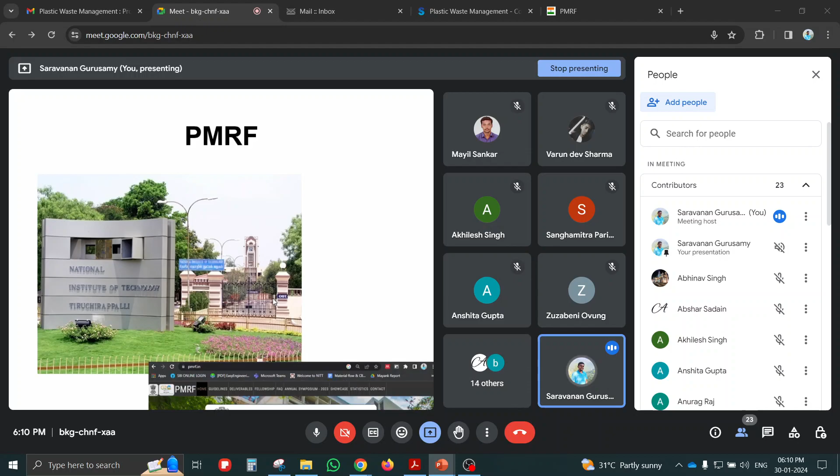I have done my BTech in civil engineering from the Government College of Engineering in Tamil Nadu, and my MTech from Anna University in Chennai through GATE score. Then I joined NIT Tiruchirappalli in 2021, and I am now the Prime Minister Research Fellow under the Ministry of Education, Government of India.

So this is a simple slideshow. Hope the slide with the web page is visible. This is the Prime Minister Research Fellows website, and these are the list of institutes eligible to get the PMRF fellowship. The only NIT in India to get PMRF fellowship is NIT Trichy, and I am one of the research PMRF in this institute.

I have submitted my proposal and joined as a lateral entry scholar for the PMRF, and as per the deliverable guidelines, I am expected to teach in any of the IITs, Polytechnics, Engineering Colleges, or NPTEL courses, 1 hour per week, to complete my deliverable guidelines.

So now NPTEL has assigned me this course, Plastic Waste Management, as I have an environmental engineering background. I am teaching every week 2 hours as per the schedule, every Tuesday 6 to 8 p.m. I am receiving a fellowship of 75,000 per month in my third year, and I will get 80,000 in the next year.

So this is a broad introduction about the PMRF. We will continue with this lecture's PPTs.

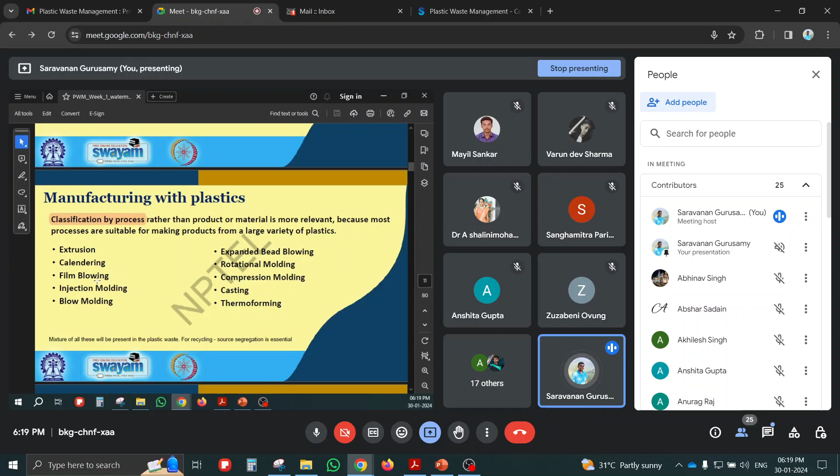Okay, so these are the additives used in the manufacturing of plastics, and some of the processes used to manufacture plastics are extrusion, calendering, film blowing, and all, we are going to see in the upcoming slides.

Extrusion is a major process used to make plastics of desired shape, using different dies to make the product of desired shapes. We use screw conveyors, twin screw or single screw conveyors, to heat the pellets. We get a molten plastic at the outlet, and we can add a die to get the desired shape and the product. We can make a hollow tube, sheets, or any product using this screw type of extruder. These are called extruders. But the limitation is we can only get uniform cross section products.

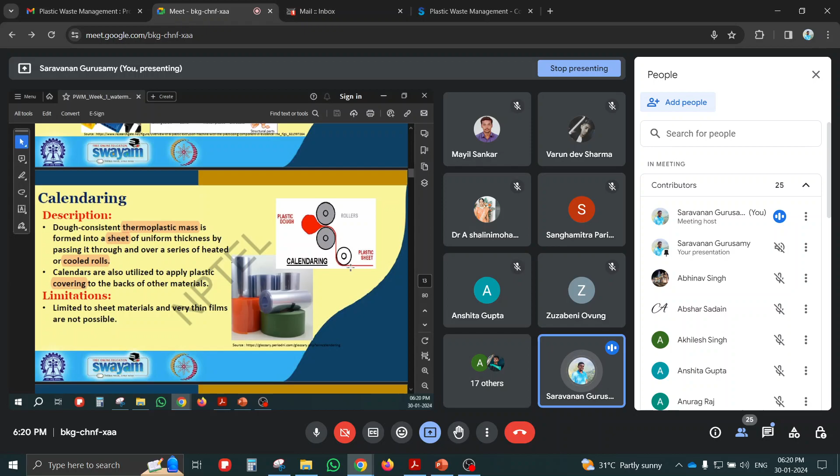The next one is calendering. Calendering is used to produce sheets of plastics like thermoplastics. Plastic dough is pressed between two rollers, and you get a sheet of plastic. This process is called calendering, and the limitation is that very thin films cannot be made using this process.

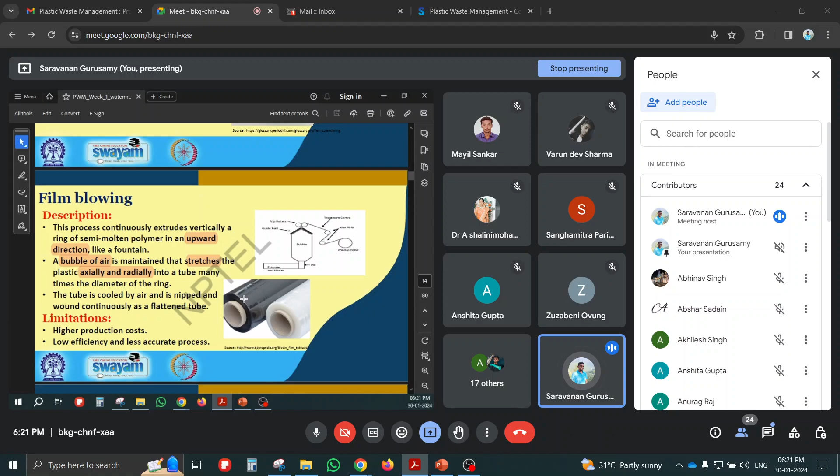So for making thin films, we use film blowing. Here, like the extruder, the molten plastic comes up and air is also blown through the die. The plastic film is divided into two hollow sections, and it is rolled between two rollers to get a thin sheet. An upward movement happens with a bubble of air flowing from the bottom, stretching axially and radially to a diameter of ring, and it forms a flattened tube between the rollers. The limitation here is higher cost of production, low efficiency, and less accuracy.

This is a process called injection molding. Here the same type of extruder is used, but along with extrusion, we use pressure, like a hydraulic jack, to press the mold, and we get the desired shape in the mold. That's the difference between extruder and injection molding - we are pressing the molten liquid into the desired shape we want. Here also it's not economically practical.

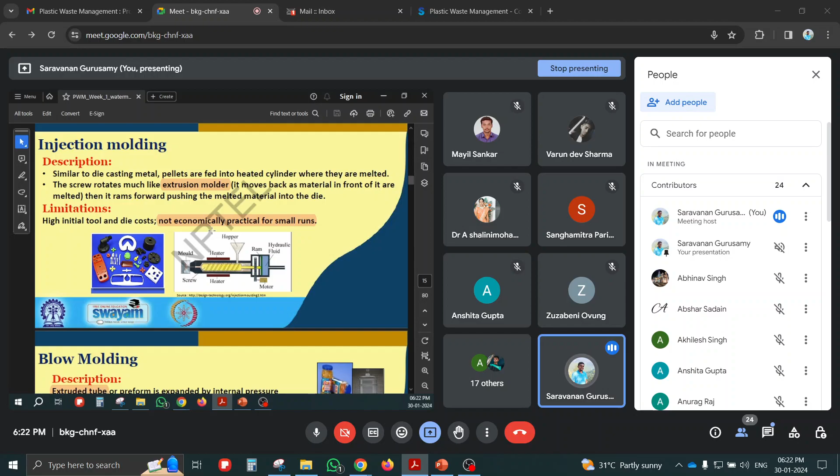Then blow molding. You can see blow molding in our plastic bottles or water bottles - they are made using the blow molding process. After extrusion, the molten liquid flows through a tube, then compressed air is also flown through the same tube, and it expands to the desired shape, then cools down, and trimming happens. Then we get the final product like bottles or containers.

Then expanded bead blowing - this is the process used to manufacture foamed plastic. This type of foamed plastic can be produced using bead blowing. The beads are first filled into the hopper, then heated under high pressure, and we get an expanded and blowing agent of foamed plastic. It will have a cell structure. The limitation is it creates more waste.

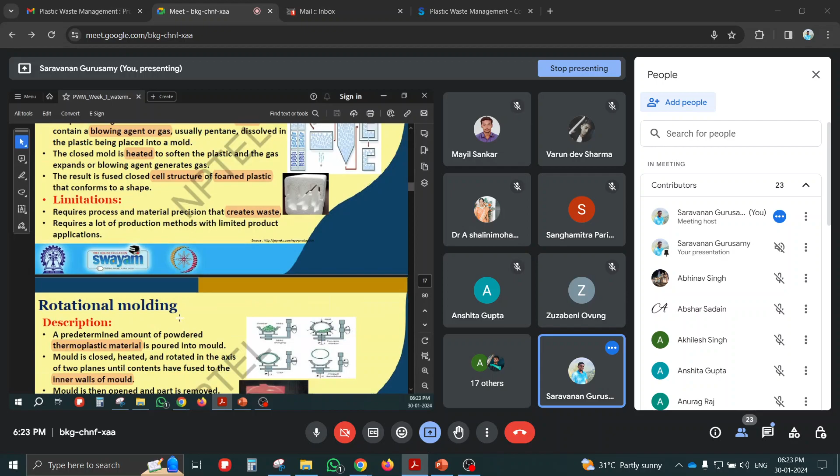Then this is called rotational molding. The pellets, or raw material for the plastic, are rolled into the desired shape under heating, forming a layer around the mold. Drums or septic tanks can be manufactured by this process. First the lower hemisphere is filled with plastic raw material, then the top one is fixed along with the bottom one, then it is rolled under heat. The inner wall of the mold is smoothly filled with raw material, and you get the product after cooling down. The limitation is it is limited to only hollow structures, and the production rate is also very slow.

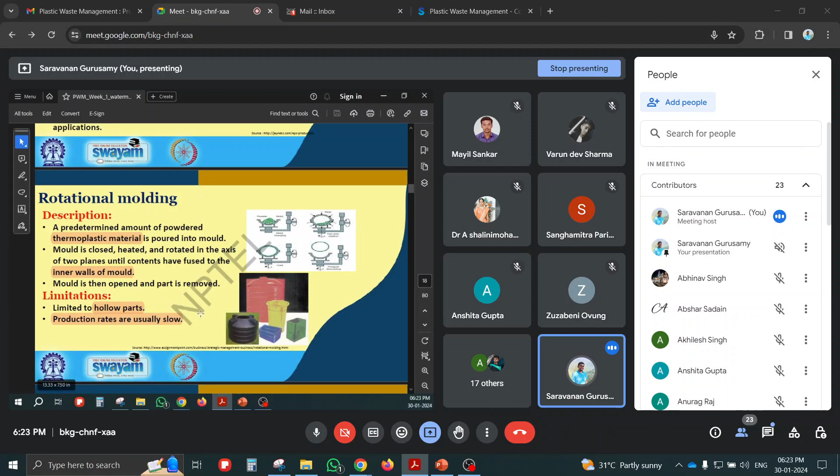This is compression molding. Here direct compression, along with heat and pressure, completes the polymerization process, and the product is ejected out.

This is a casting process. It's simple, like clay casting. The desired mold is cast with the liquid raw material plastic poured without pressure. Just by flowing liquid, it applies over the desired shape, and forms the product, like spoons or toys, which we can make using this casting process.

Then thermoforming - in this process, the sheet is blown upward or downward using the mold. The thermoplastic sheet uses a vacuum to pull or push, forming a desired shape. Here also the limitation is high scrap forms during the manufacturing process. So these are the characteristics of plastic.

Plastic has high resistance to chemicals and corrosion. It can be both thermal and electrical insulator, having a high strength to weight ratio, durable, resistant to water, and having low toxicity.

In the discussion forum, somebody asked about plastic being low toxic. Why? Because the monomers used in manufacturing plastic are less toxic, but the additives added to make plastic more durable and to suppress the degradation process make the plastic toxic during degradation.

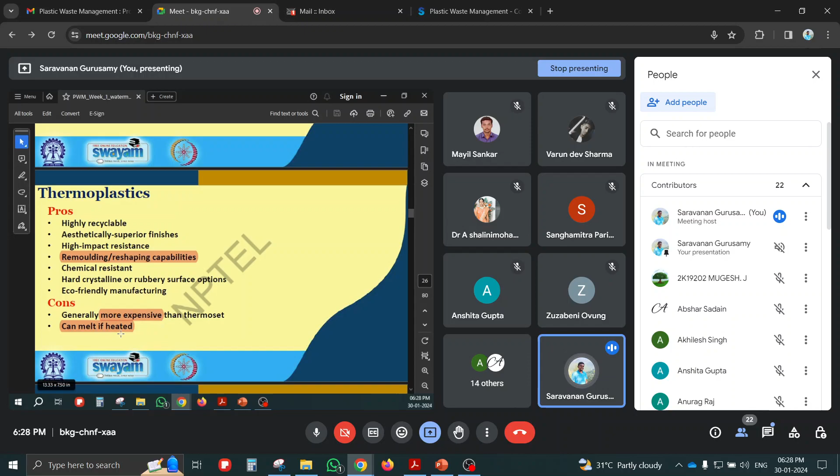An important application of thermoplastic is it can be remolded and reshaped, giving it reshaping capability. The problem with thermoplastic is it is more expensive, and melting if heated is the problem. Examples of thermoplastic: polyethylene, polypropylene, polystyrene, Teflon, nylons, polycarbonate, acrylics, ABS.

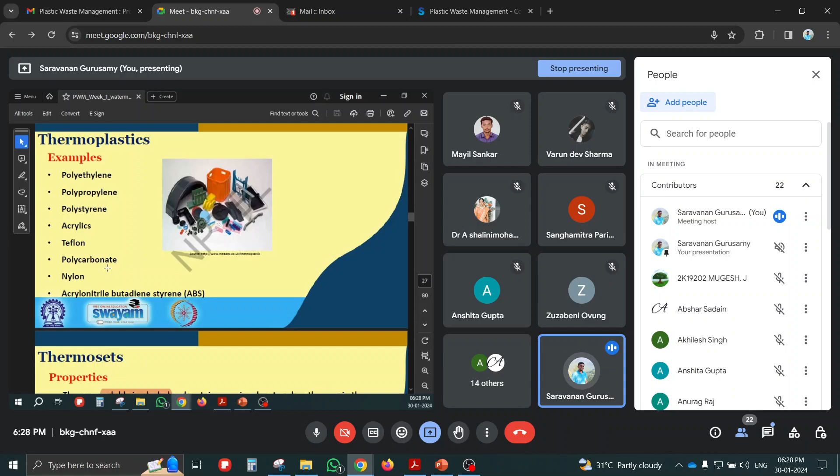These are thermosets. Thermosets are insoluble in alcohol and undergo an irreversible chemical process, so they can't be recycled. But they are durable, strong, and hard, mainly used in engineering applications of plastics.

Our laptops are made up of thermosets, and some plastic bottles and caps are made up of thermosets. They are more resistant to high temperature. The problem is they can't be recycled and are difficult to surface finish.

Examples of thermosets are epoxies, polyurethane, unsaturated polyesters, phenolics, and silicones. You can remember these examples, as sir usually asks assignments based on these types of examples of thermoplastics and thermosets.

These are classifications of plastics based on structure, that is homogeneous or heterogeneous plastics. The monomer containing only hydrocarbon atoms is called homogeneous plastic, like polyethylene, polypropylene, polystyrene. Some may have carbon, hydrogen along with oxygen, nitrogen, and other elements, exhibiting a heterogeneous structure, like polytetrafluoroethylene, polyvinyl chloride, acrylonitrile butadiene styrene (ABS). These are examples of heterogeneous plastics.

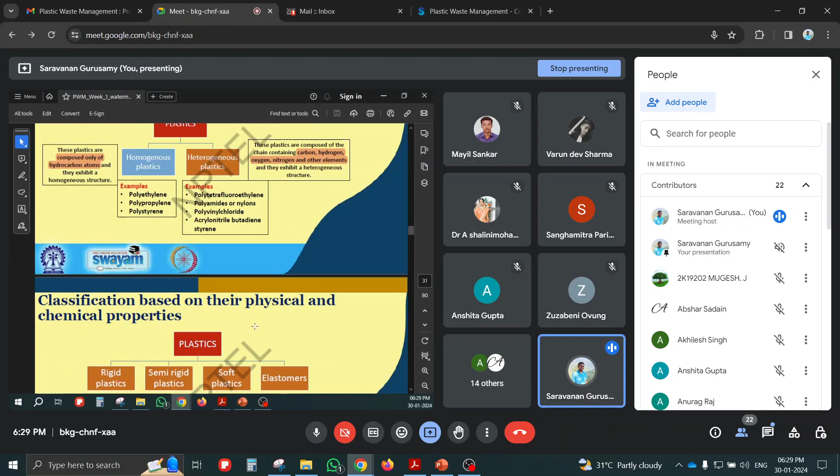Plastics based on their physical and chemical properties are rigid, semi-rigid, soft, and elastomers. From left to right, you can see rigid to elastic, with elastic property increasing. You can see some examples here.

HDPE, PP are rigid plastic. PET, or semi-rigid like LDPE - carry bags are made up of LDPE, flexible ducts like crushable tubes used in exhaust pipes, and PVC sheets are semi-rigid plastic. Soft plastics are used in children's toys, rattles, and fishing baits.

Elastomers like polyisoprene, polybutadiene, and polyisobutylene are elastomers. We can see this in tires and some flexible toys. We can use elastomers in gaskets as well.

These are the properties of rigid plastic, having a high modulus of elasticity. As you know, modulus of elasticity is stress by strain. High modulus of elasticity means we need more stress for a small strain - for a lower strain to happen, we have to apply larger stress. So those are all rigid plastics. Semi-rigid plastic has a medium modulus of elasticity.

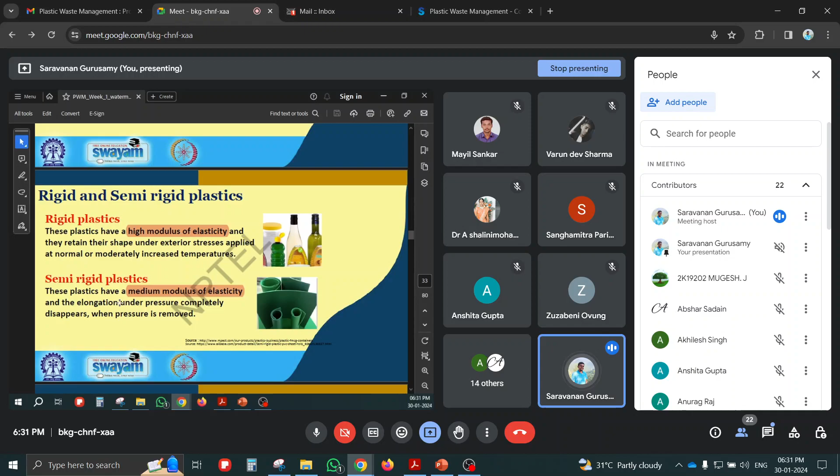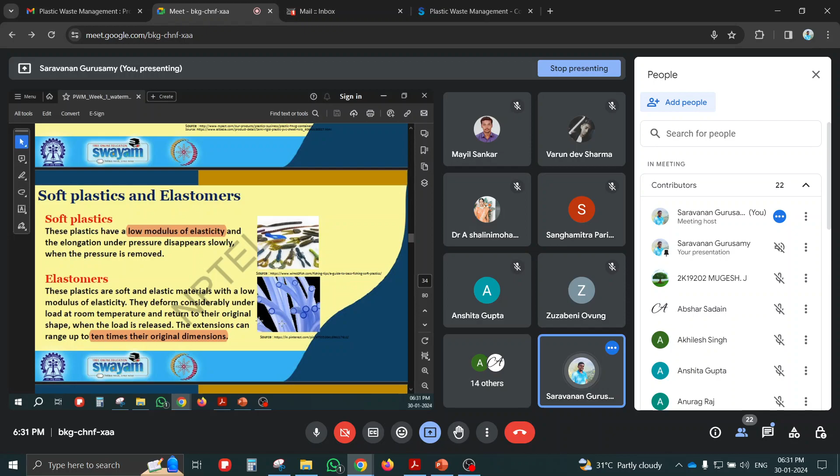Soft plastics have a low modulus of elasticity; they elongate under pressure and disappear slowly when the pressure is removed. But elastomers, at room temperature, will expand 10 times their original dimension under some pressure. Tubes like this, silicon tubes, are elastomers.

This is the classification of plastic based on the resin or type of plastics. We have given different codes from code 1 to code 7: PET, HDPE, PVC, LDPE, PP, PS, and other plastics. Other plastics may contain polycarbonate, ABS, acrylic, acrylonitrile butadiene, LCPs (liquid crystal polymers), nylon, or other types. The code was given in such a way that the first one is easy to recycle, and the easiness decreases as the number increases. So this is the basics of this code.

This is the explanation for PET. The most used plastic on the planet is PET plastic. As you know, all the transparent water bottles are made up of PET only, and this has code 1. Polyethylene monomer is used in the manufacturing of PET, and it is oxygen permeable, lightweight, semi-rigid, and hygroscopic in nature. Examples for PET include ketchup bottles. Most water bottles and food storage containers are made up of PET.

This is HDPE. HDPE was first invented in 1953 to make pipes used in storm sewers, drains, and culverts. This is the most commonly recyclable plastic. Mostly used plastic is PET, and the most commonly recyclable plastic is HDPE. This is the monomer structure for HDPE. It has a high strength to density ratio, which is why it's called high density polyethylene, with density ranging from 930 to 970 kg per meter cube. It is harder and can withstand higher temperatures.

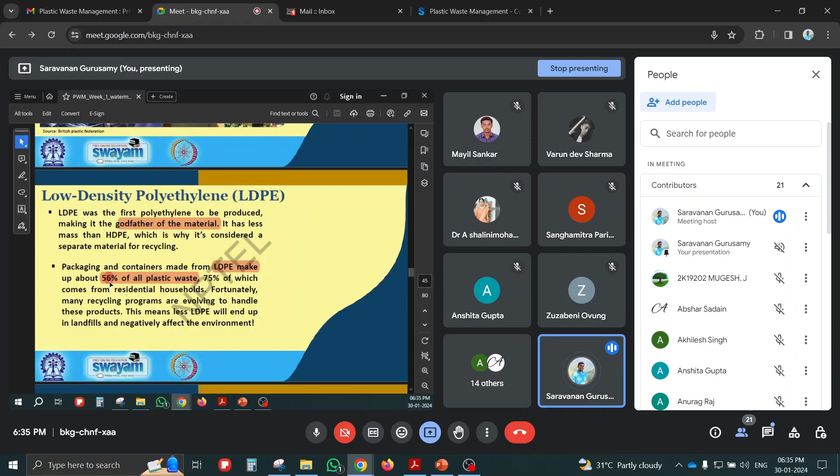LDPE is the godfather of the material, and 56% of all plastic waste contains LDPE. This is the monomer of LDPE, and the name itself indicates low density polyethylene. Its density is very low, from 0.91 to 0.93 gram per centimeter cube, and it can withstand temperatures of about 80 degrees continuously and 90 degrees for a short time.

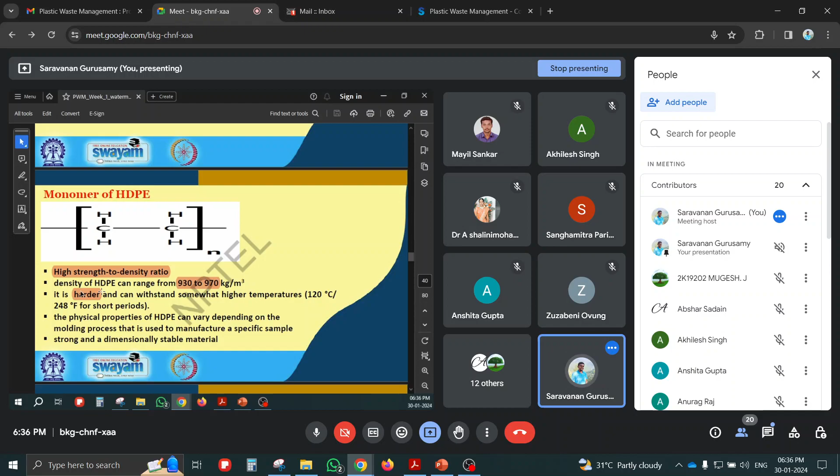But HDPE has a density of 0.93 to 0.97 gram per centimeter cube. Applications of LDPE include manufacturing packaging like carry bags or plastic bags. Some toys are also manufactured using LDPE.

Then polypropylene, PP. PP was also invented in the year 1951. Only a small fraction of PP is recycled, about 3%, but the plastic with the least fraction of recyclability is PVC, at 1%. Properties of PP, polypropylene, include: rigid, opaque, flexible, low density, excellent chemical resistance, good stability to high temperature and humidity, and weathering resistance. Applications of PP include food storage containers, chair making, knife handles, and storage containers.

Then polystyrene or styrofoam, that is PS. This was also invented accidentally in 1839, while preparing medication, across polystyrene.

Since polystyrene is lightweight and easy to form into a plastic material, it also breaks effortlessly, which is harmful to the environment.

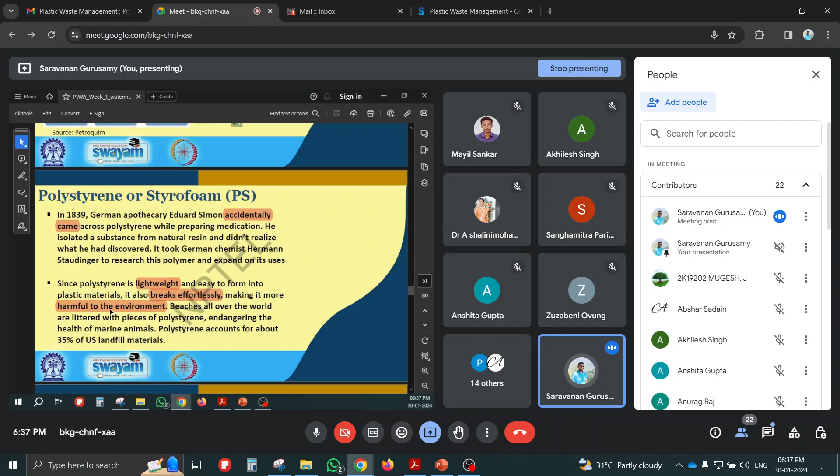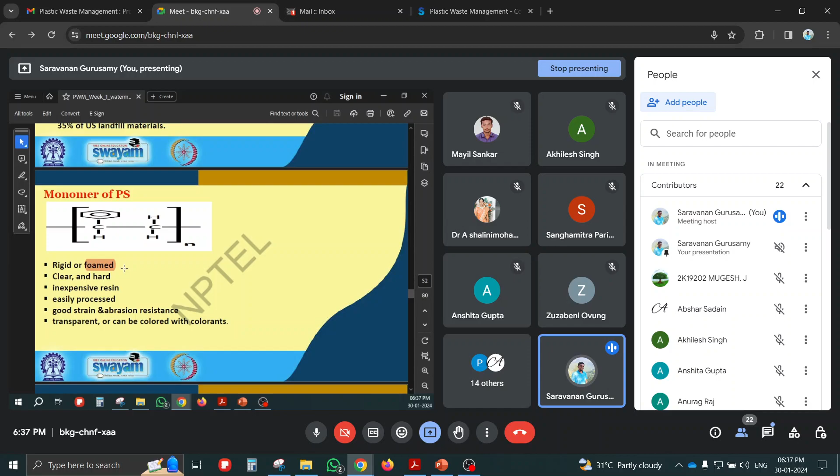This is the monomer used in manufacturing PS, and it can be rigid or foamed. The foamed plastic is made up of PS. This type of food packaging, like one-time use plastics, are made of polystyrene, such as food containers, glasses, and one-time use plastic cups.

Most polystyrene is single use. Examples include bulletproof glasses, headlamps, and baby feeding bottles, everything is made up of this.

So others are, in the seventh class, we are merging all other plastics like BPA, ABS, everything coming under this miscellaneous plastics category. Polycarbonate, polyacrylic, acrylonitrile butadiene styrene, fibers, nylon will come under this others or miscellaneous plastic category. Many BPA products fall into this category.

We have to avoid this in food products because, as I mentioned, seventh others are in the seventh code, so it's very hard to recycle. It's not very easy to break down, and it is impossible to recycle, but it has good properties like UV resistance and glass-like visibility.

That's why we are using this in bulletproof applications. Sorry, I have misplaced this here, actually this should come here. So other examples of the seventh code is polycarbonate, having a UV resistant property.

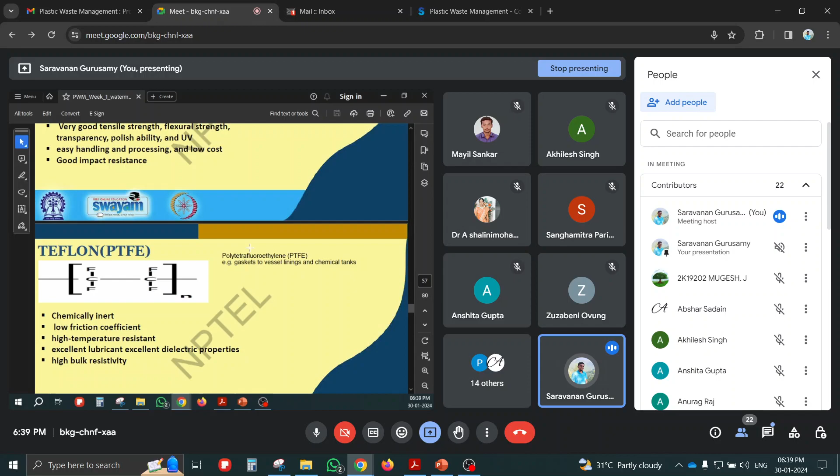Polycarbonate is used in aircraft canopies, and Teflon is used in gaskets and vessel lining.

Polyamides are used in clothing fibers, used in the textile industry, we can use polyamides.

ABS is acrylonitrile butadiene styrene. Some of you may have seen Lego toys, those building blocks are made up of this ABS.

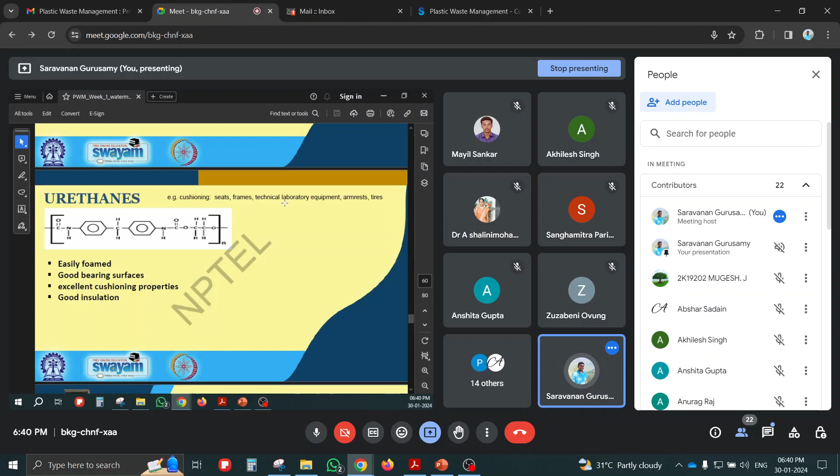Urethanes are used in the cushioning of car seats, and some frames and technical laboratory equipment are made up of urethanes.

For medical applications, like IV, respiratory fittings, catheters, surgical equipment, and disposable gloves. As you know, all the masks we used and protection kits during COVID were made up of plastics only. And in construction industries, from top to bottom, we are using different types of plastics.

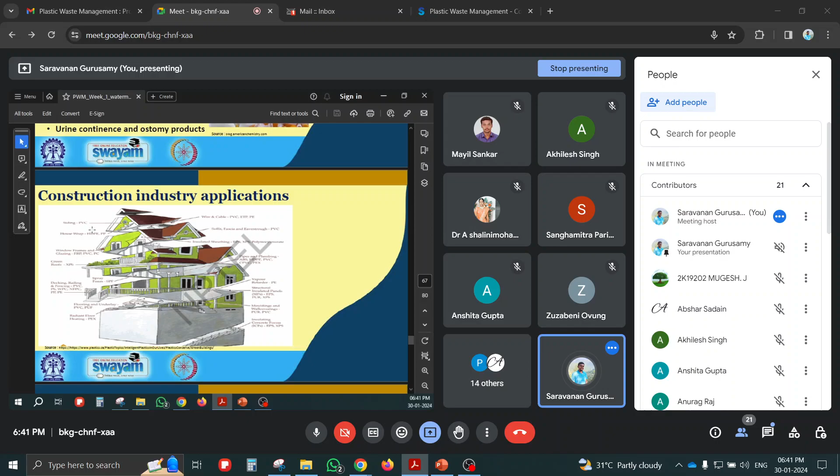A major plastic used in the construction industry is PVC.

For electrical and electronic equipment, plastic is a good insulator and has flame retardant capacity as an additive. So we use plastics as a major component in manufacturing electrical and electronic applications, like different types such as ABS, amino resins, epoxy resins, polyester, polyethylene, polyamide carbonates. All of these are used in different electrical and electronic products.

For consumer goods, personal care products and household products are mostly packed with plastic. In the packaging industry, food packaging and cool drink packaging all have plastic. And optical media like CDs, fiber optics, older floppy disks, and nowadays pen drives, up to pen drives we are using plastic only.

So these are the applications. Now we are going to discuss the global and Indian statistics.

How much plastic is produced globally, and how much plastic waste is produced globally, and in the Indian scenario we are going to discuss.

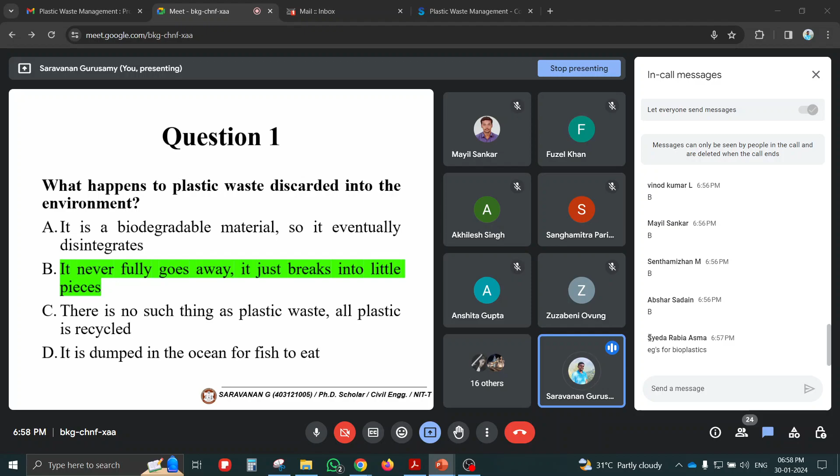That's why nowadays there's ocean cleanup of the Great Pacific Garbage Patch, which we'll discuss further in the waste management weeks. He will discuss about the Great Pacific Garbage Patch - that is a bigger island in the Pacific Ocean. It's not an island; it's an island of plastic waste.

Due to the circular motion of the ocean current waves, all the plastic waste moved to one place in the Pacific area, and it ended up as a huge island called the Great Pacific Garbage Patch. You can also go through the internet - major super funds are allotted to clean up this plastic waste dumped in the oceans. It's not directly dumped in the ocean; it ends up in the sewers and rivers, and finally reaches oceans. So this is the transport pathway for the plastic waste.

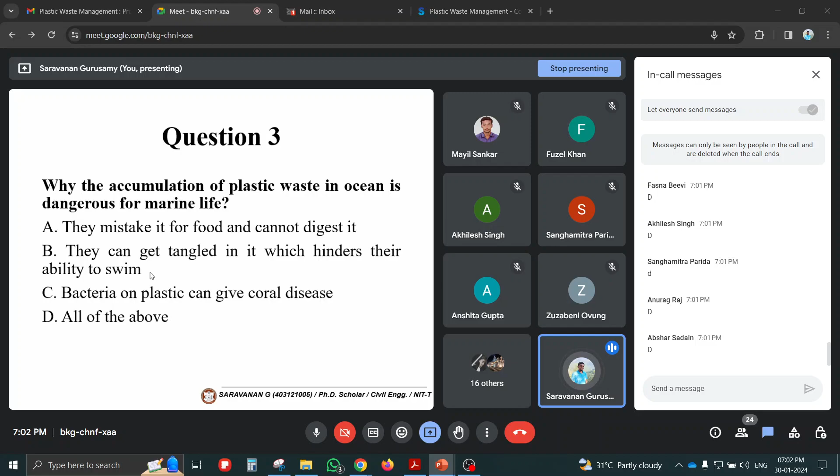The second point also discusses the same thing - they can get tangled in it. Another major source of plastic waste in the ocean is fishing nets used by fishers. Nowadays, instead of threaded nets, they are using plastic nylon nets, and they discard the nets in the ocean itself if it gets tangled. So fishes or marine life get stuck in these nylon strings and can't escape, and their life ends there. The third point is bacteria on the plastic give coral disease - that's another concern about plastic. So all of the above is correct here.

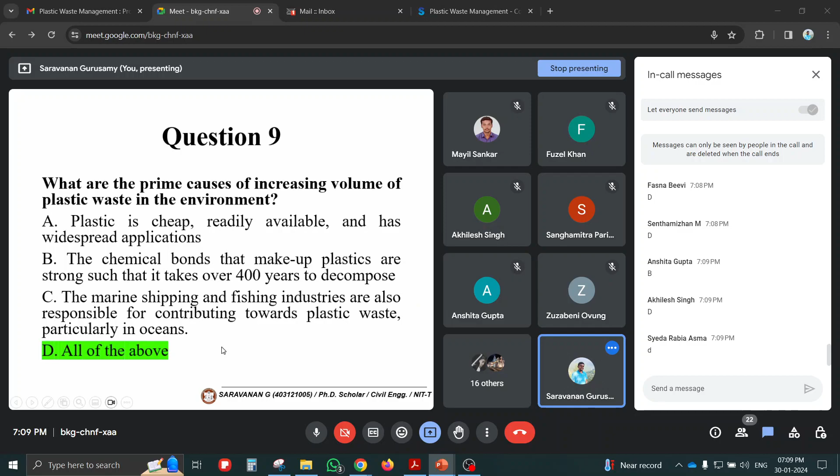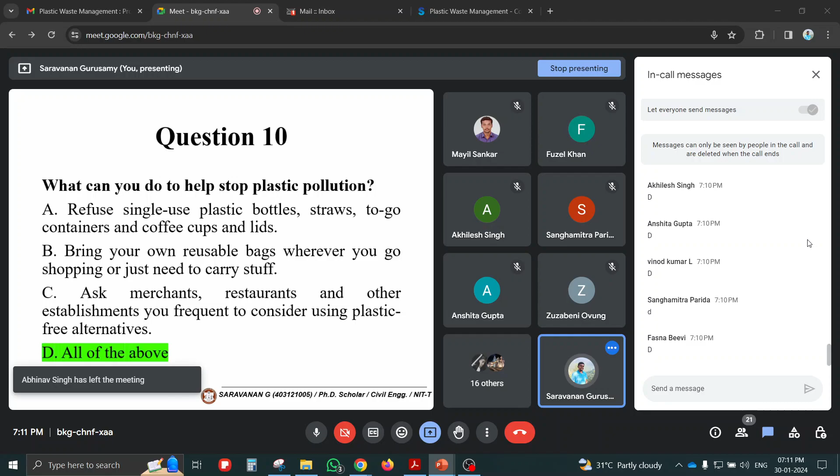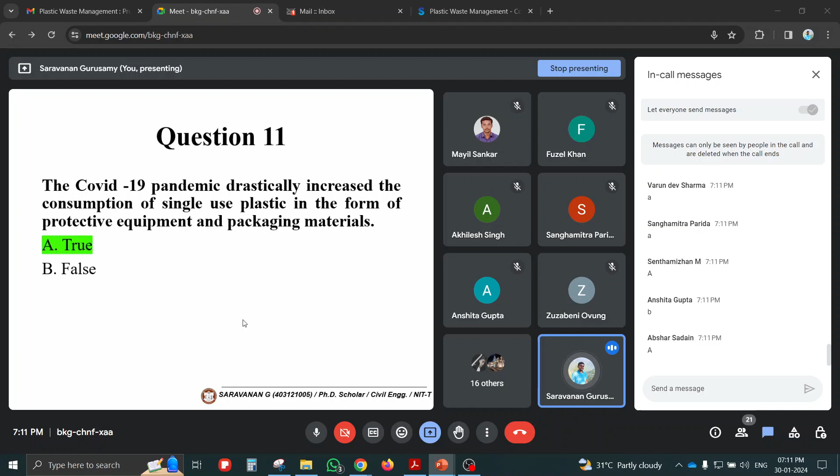Question 11. The COVID-19 pandemic drastically increased the consumption of single-use plastic in the form of protective equipment and packaging material. Is it true or false? It drastically increased the consumption of single-use plastic. Actually, it's true. So, was it mandatory during that time? It was mandatory, yeah, to consume single-use plastic.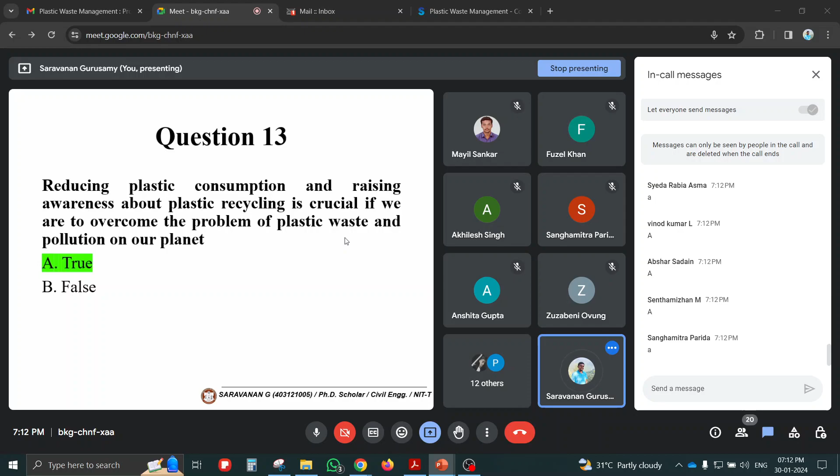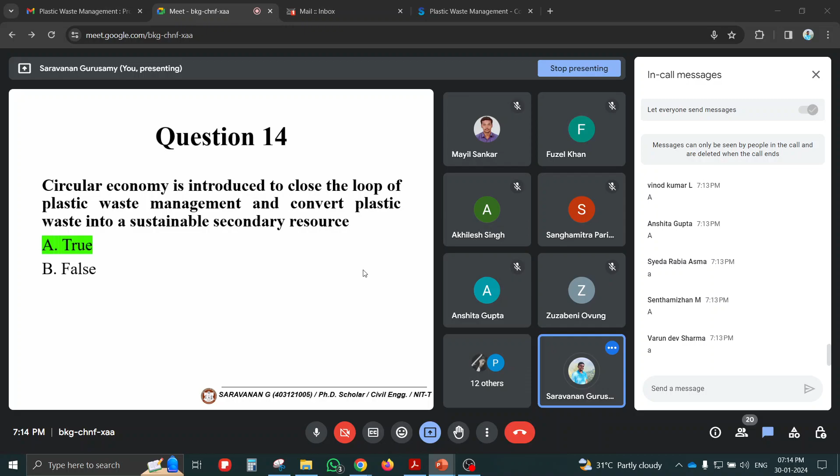Question 15. Globally, more than 40% of the plastic waste is recycled and 60% is directly discarded into the aquatic and terrestrial ecosystem. Is it true or false?

It's tricky. I too answered first as true, but it's actually false. Only 9% of plastic waste is recycled. I can show you the report - this is the report confirming only 9% is recycled.

15% is collected for recycling, and 40% of that is disposed as residues. Another 19% is incinerated - that waste is collected and sent to a waste-to-energy plant to get some energy. 50% ends up in the landfill. If waste is collected, it ends up in landfill; if not collected, it goes to uncontrolled dump sites.

So only 9% was recycled. The rest, 91%, is not recycled and is directly discarded - 19% incinerated, and others discarded in landfill or ocean. So as per the OECD report, hope you're okay with the answer being false.

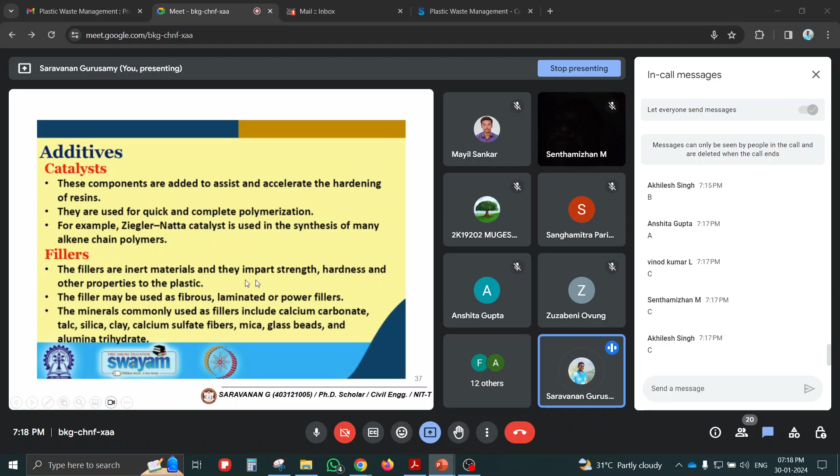So here you can see: catalyst, fillers are inert material that impart strength. Catalyst assists and accelerates the hardening process. Plasticizers improve the plasticity. Solvent is used to dissolve the plasticizer.

Then question two: which of the following methods is suitable for manufacturing of sheet material? We have seen different types of methods used to manufacture plastics. So for sheet material, C is correct.

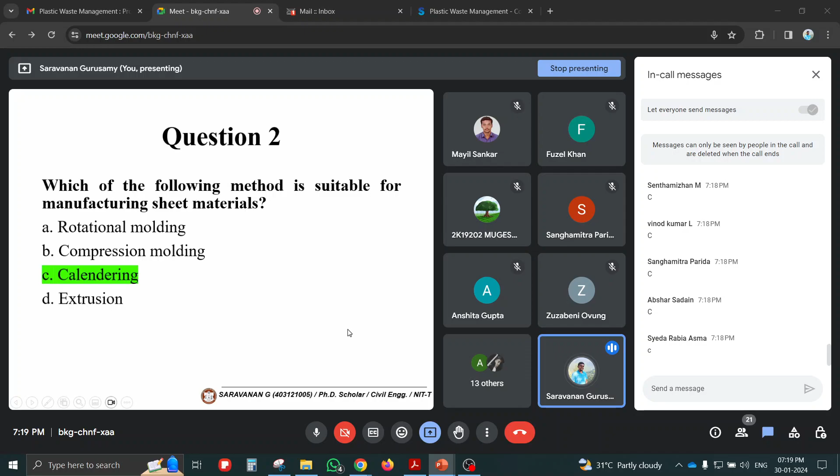Okay, I'll go to the next question. So, sorry, the answer is calendering. Yes, you can see calendering.

Here the thermoplastic was sent between two rollers and it was manufactured into a plastic sheet. So here the limitation is, very thin plastic cannot be possible - only sheet can be possible with calendering.

The third question is the category of plastic that can deform considerably under load at room temperature and return to their original shape when the load is released. Deform - so it's like soft or elastomers. C or D.

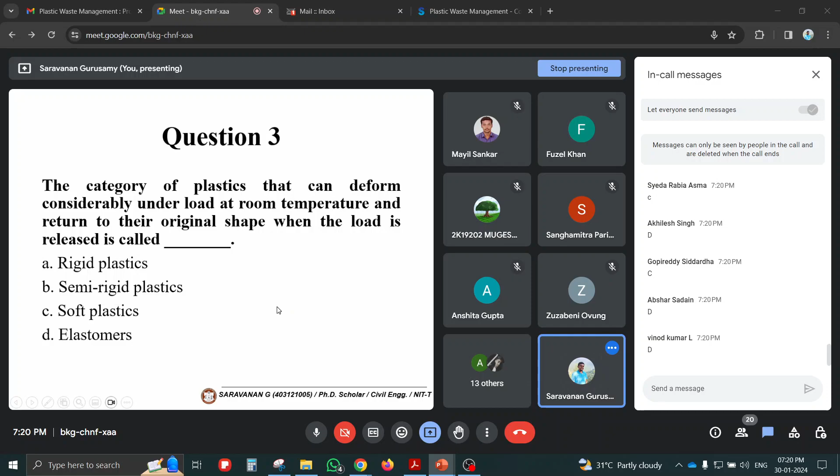Undergo load at room temperature itself, so C or D. Yeah, elastomers is the answer, D.

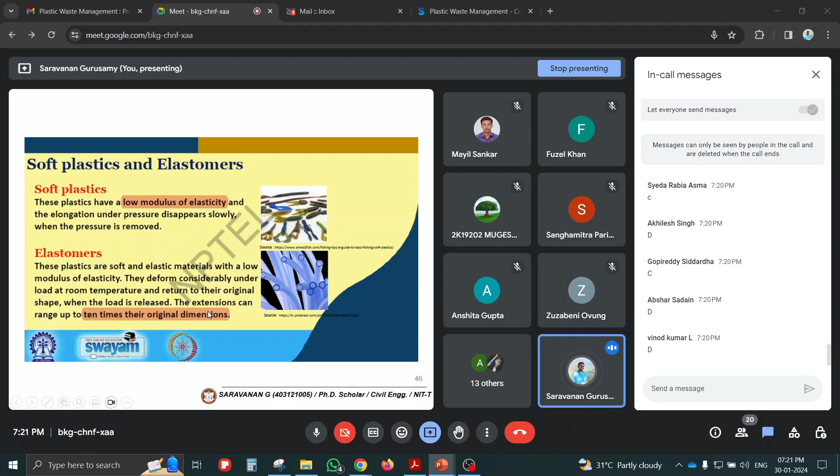So here you can see rigid plastics have high modulus of elasticity and retain their shape. Semi-rigid, having medium modulus of elasticity, will elongate under high pressure. Soft plastic, having low modulus of elasticity, also elongates under pressure and disappears slowly. But elastomers, at room temperature itself, under small load, will elongate and return to their original position, and can extend up to 10 times their original dimension. So elastomers is the answer.

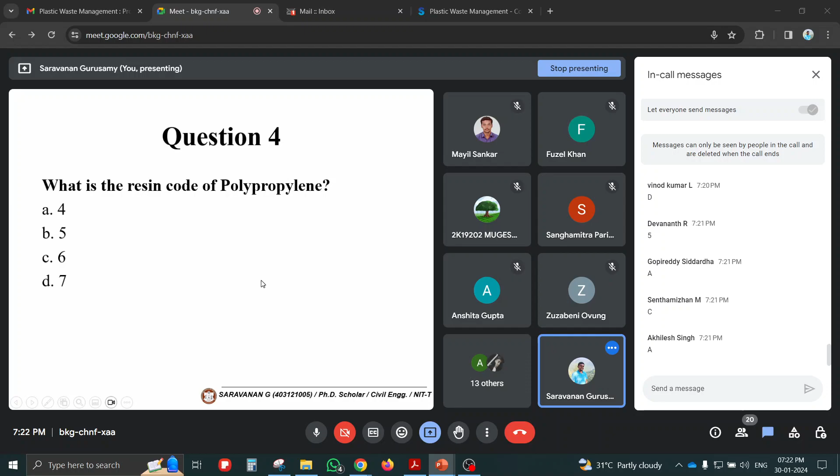What is the resin code for polypropylene? PP. You can go through the code: the first one is PET, second one HDPE, third one PVC, then... the answer is 5. You can see PET, HDPE, PVC, LDPE, then PP, PS. Polypropylene is fifth.

Question 4-5: which among the following statements is correct? HDPE is the most commonly recycled plastic because it will not break under exposure to extreme temperature conditions - HDPE is most commonly recycled, not necessarily easy to recycle, but commonly recycled. PET has excellent moisture and water barrier properties. PVC is one of the least recycled materials - generally less than 1% of PVC plastic is recycled every year. All of the above.

Yes, all the above is correct. HDPE is the most commonly recycled plastic.

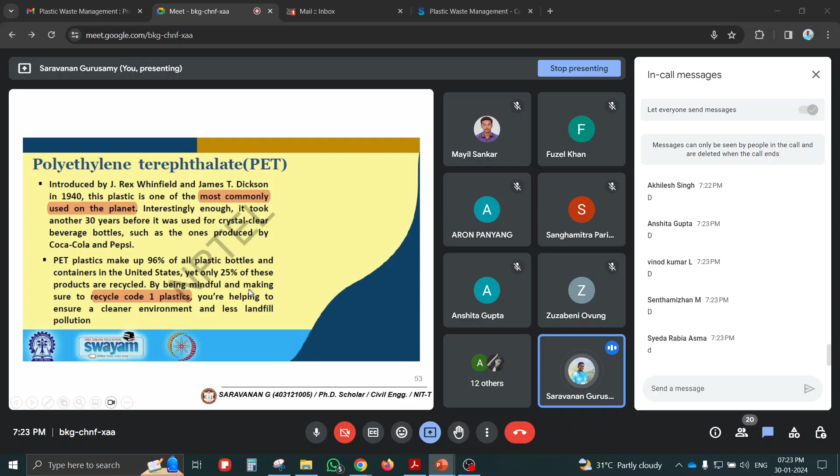PET, what they have mentioned, is an excellent moisture and water barrier material, as mentioned here. This is the property of PET.

PVC is one of the least recycled materials, having only 1% of PVC recycled. So the answer is all of the above.

Not recycled PVC every year - the data mentioned is annual data. About 1% of PVC plastic is recycled every year. If you produce 100 kg of PVC every year, 1 kg goes to the recycling plant, and the other 99% ends up in the landfill or ocean. That's the data - not recycled every year. It's yearly data.

Sixth question: state whether the following statement is true or false. The basic structure of plastic generally includes a main chain inorganic link and side linked molecular groups, and some organic and inorganic blends added as an additive.

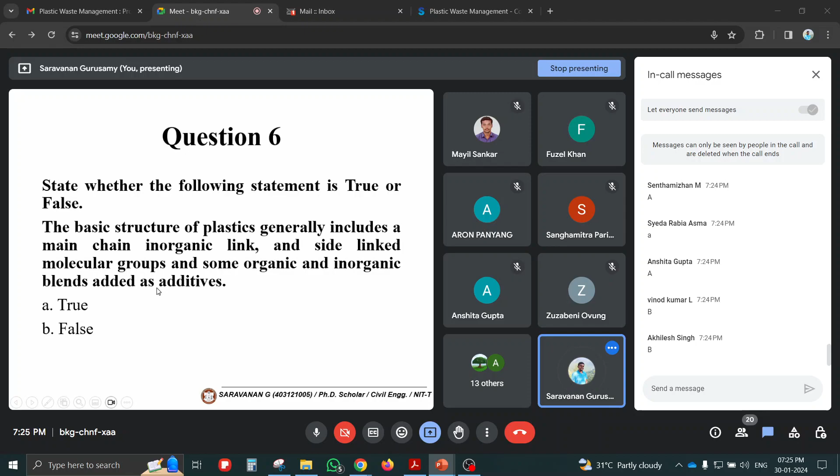No, A is not correct actually. The only tricky option here is the inorganic link. The main chain is made up of an organic link, and the side linked molecular groups may be organic or inorganic blends added as an additive. So this is false - this is the definition of plastic. Plastic generally includes a main chain organic link, like polyethylene, polypropylene, or polystyrene, having an organic link as the main chain. You can see in the structures CH, CH - so everything is organic only. Whatever has hydrocarbons is organic. So the answer is false.

Which one of the following plastic resins is used in cable and wire insulation?

If you go through the different types of plastic and their applications, you can see polyethylene (PE) is the resin used in electrical and electronic applications - specifically cable and wire insulation, for its insulation properties. Polyamide is used in food processor bearings and adapters. So the answer is polyethylene.

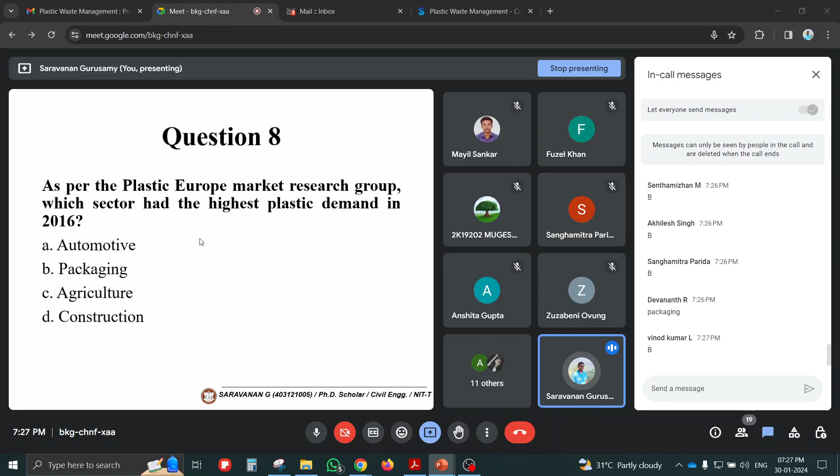As per the Plastic Europe Market Research Group, we had seen the global statistics. Eighth question: which sector had the highest plastic demand in 2016? These are all the sectors with different applications - which one has the highest plastic demand? The answer is packaging. As we know, 40% of plastic is used in packaging, followed by buildings at 19.7%.

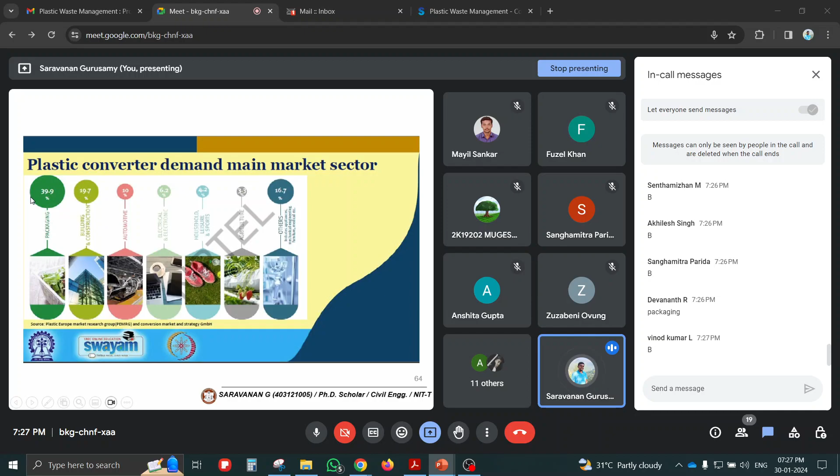Ninth question: the plastic manufacturing process in which an extruded tube is expanded by internal pressure, generally limited to hollow or tubular parts, with some versatile mold shapes, is called what molding?

Generally limited to hollow or tubular parts - note that down. Extrusion won't give hollow parts, injection also won't give hollow parts. Rotation and blow molding will give hollow structures, but expanded by internal pressure means it's only blow molding. Rotational molding doesn't have any pressure - it will just rotate and the inner surface will have molten plastic bound to it, forming a hollow structure like a Sintex tank. But blow molding, with extrusion pressure, comes up and air goes in between.

Like PET bottles were made - I had shown some diagrams. The hot plastic was extruded into a hollow tube and air was passed into it. It was blown, then cut and trimmed, ending up as a container or bottle. That's called blow molding, so the answer is blow molding. You have to look for hollow or tubular parts - extrusion won't have any hollow section, it will just extrude and form a die like a cap. Same with injection molding.

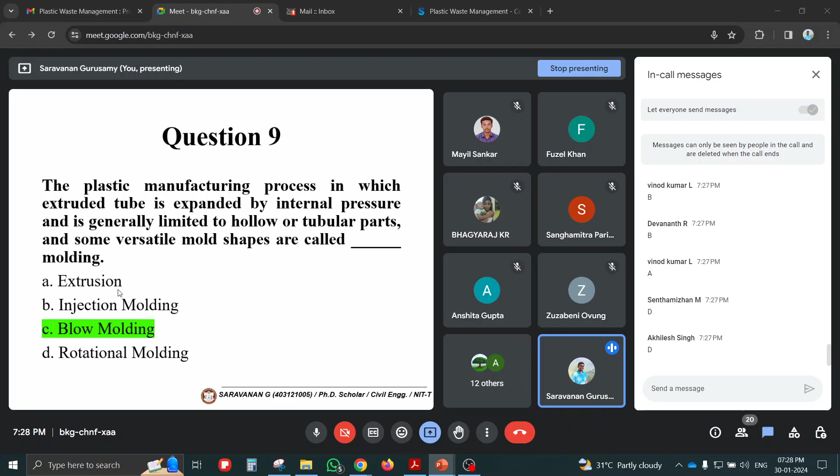Question 10: according to Plastic Europe 2017, which country is the largest producer of plastic material? The largest producer of plastic material, not the waste producer - plastic producer.

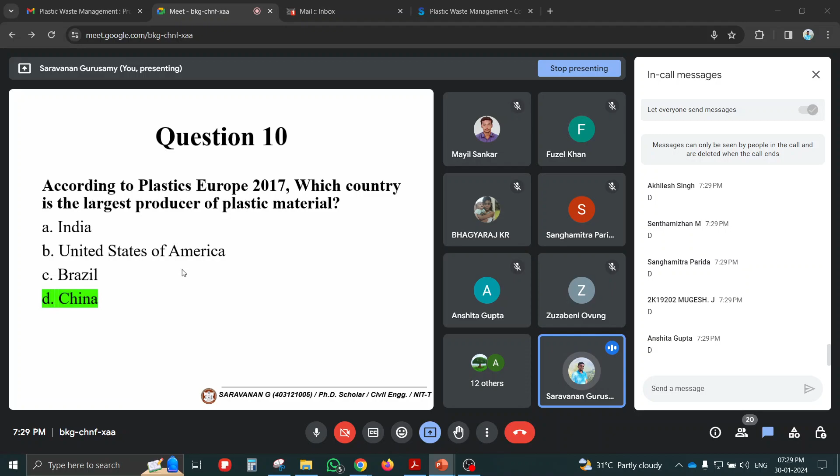As we had seen, 50% of the total plastic was manufactured in Asia. Of that, the major producer is China, at about 30%, that is 29%. Hope you remember this chart as per the Plastic Europe 2017 report.

Question 11: the addition of dyes and pigment during the plastic production process helps in two ways - one is it acts as a filler and imparts desired color. Is both correct or wrong? Think about whether pigments will impart only color, or if they will also act as a filler.

Think about it. Actually it's true. In the slide I mentioned the addition of dyes and pigment helps in two ways - one, it acts as a filler, and it also imparts desired color to the plastic. So the answer is true. The colorant helps in two ways: it also acts as a filler, imparting strength and desired color.

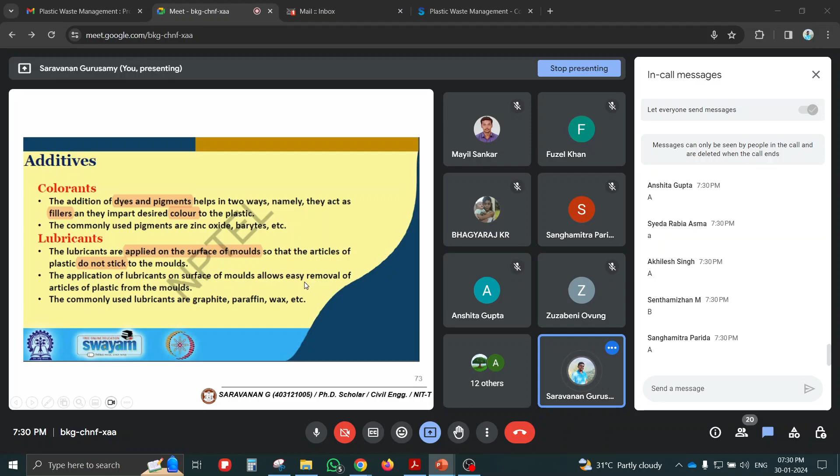The 12th question is: which type of plastic is called poison plastic?

Why is PVC called poison plastic? Yes, the answer is PVC. It's not because of recycling.

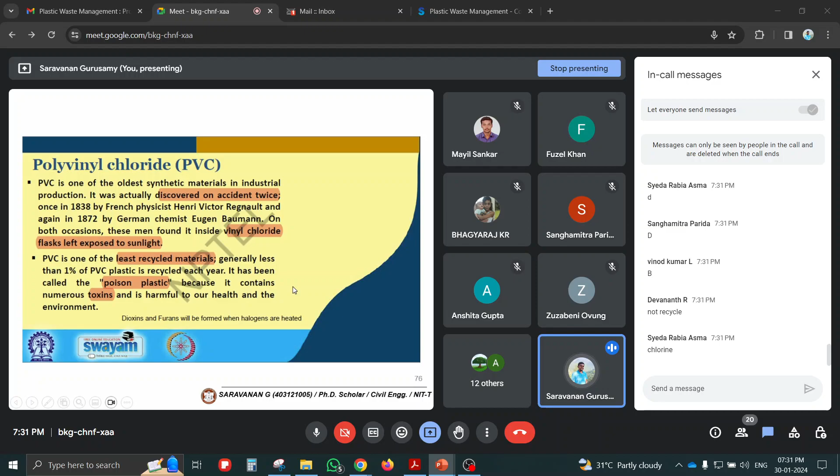What is the full form of PVC? Polyvinyl chloride. So the halogen compound present in PVC makes it toxic. While burning halogen compounds, it releases dioxin and furan, which makes PVC toxic. PVC plastic is called poison plastic because it contains numerous toxins like chlorine, so if it is burnt in the open environment, it will release dioxin and furans.

13th question: Which among the following statements is incorrect regarding the general attributes of plastic? Plastic can be resistant to chemical and corrosion. Plastics are both thermal and electrical conductors. Plastic have a meagre strength to weight ratio - meagre means negligible strength to weight ratio. Plastic can be highly durable, resistant to water, and have low toxicity. They are asking about the incorrect statement.

So the first one is resistant to chemical and corrosion. Second, highly durable, resistant - the last one is also correct. One second, I will check the meaning - low strength to weight ratio.

So the answer is B and C, both are incorrect statements. Low strength to weight ratio is wrong - plastic has a high strength to weight ratio, and thermally and electrically it's an insulator. It won't conduct thermal and electrical currents. It has very high resistance to chemical and corrosion, very high strength to weight ratio, durable, resistance to water, and low toxicity. They are both thermal and electrical insulators.

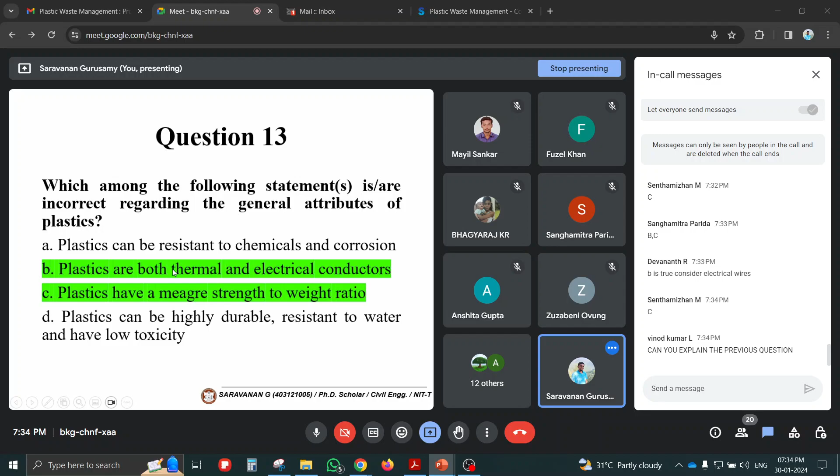Question 14: Which among the following is not an example of thermosets? I have discussed about this - considering electrical wires, let me explain. They are asking about the incorrect statement. The first one, plastic can be resistant to chemical and corrosion, is a correct statement. Second one, plastics are both thermal and electrical conductors.

Plastic is a non-conductor, both thermal and electrical, so it's an incorrect statement. Plastic have a meagre strength to weight ratio - they are mentioning negligible strength to weight ratio, but plastic has a high strength to weight ratio, so that is also wrong. The fourth option, plastic can be highly durable, resistant to water, and have low toxicity - that is correct. So answers B and C are incorrect.

Actually, B is true considering electrical wires, sir - it's actually wrong, it will be insulator. Thermal insulator and electrical insulator, that's the property of plastic. You are talking about the wires maybe - wires are conductors, but the outside coating, what we are seeing in the charger, laptop charger or phone charger, the outside is PE, polyethylene coating, which is insulator only.

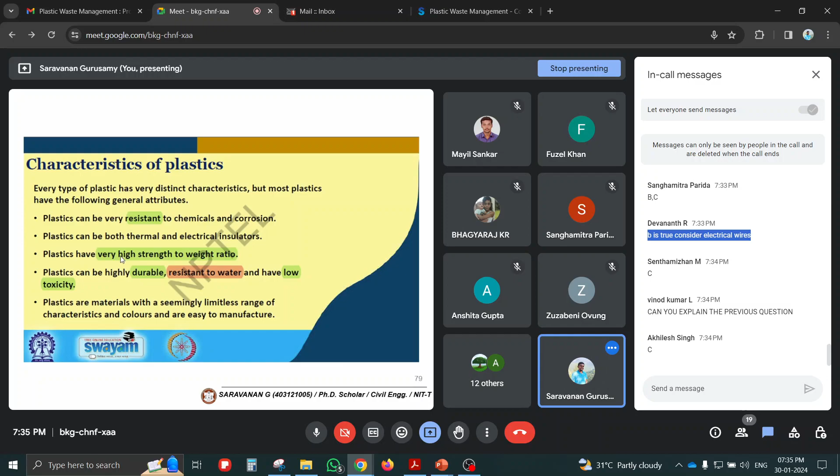This is about which among the following is not an example of thermoset. So you have seen the examples for thermoplastic and thermoset plastics - which is not an example of thermoset? Teflon, silicone. Teflon is correct.

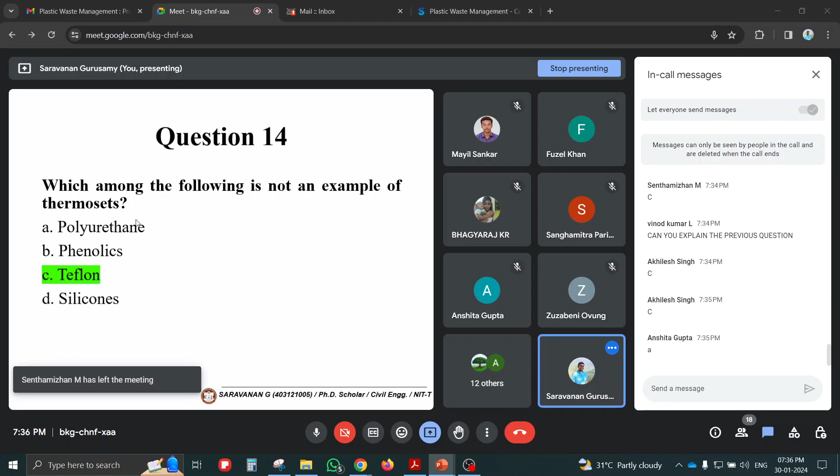I'll show the answers. So thermoplastics - polyethylene, polypropylene, Teflon, nylon - are thermoplastics only. Only thermosets are epoxies, polyurethane, phenolics, silicones, unsaturated polyesters. So kindly remember this, we are having another question based on this chart.

So the 15th question: thermoplastics can be remolded as many times as required - true or false? Thermoplastics are recyclable, can be remolded as many times as required, so true. This is the difference - it will soften by heating and harden when cooled down, and can be remolded as many times as required. But thermosets cannot be reused.

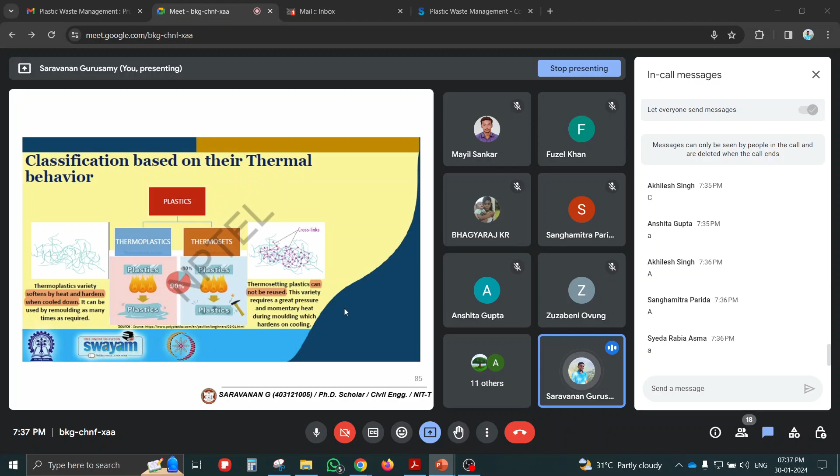Thermosets require greater pressure and momentary heat during molding and harden on cooling. So when heated again, it will go into gaseous phase directly and it is very hard. If you apply heat, the plastic converts into molten state - that is thermoplastic. If you apply heat and it hardens, that is called thermoset. You can see our chairs - chairs are made up of thermoset plastic, if you heat it, it won't melt. But if you see plastic covers, LDPE or plastic water bottles - normal transparent water bottles - if you heat it, it will melt. That is called a thermoplastic.

The 16th question: Which type of plastic had the highest demand in India, as per the chemical and petrochemical statistics 2013? This also we have discussed, I guess.

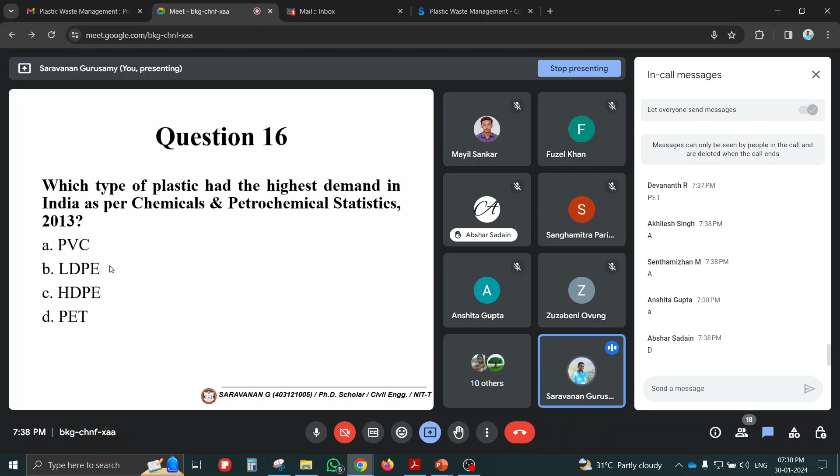Okay, the answer is PVC. So here is the statistics: if you break up the demand of plastic in India, PVC is in the first place. PVC demand is 28%, followed by PP, HDPE, LLDPE, then LDPE. Major usage of PVC is in building and construction sectors. This also helps answer which part of India uses plastic more.

Question 17: flame retardants are added during plastic production to remove fire propagation radicals like H radical and OH radical and others. Is it correct? Yes, correct. Flame retardants are added during polymer plastic production to remove fire propagating radicals like H and OH radicals, as mentioned here.

Question 18: which of the following is not a property of polypropylene? Kindly go through the properties of different types of plastics and remember some of them. If you see examples of each plastic, you can easily remember the properties. The options are chemical resistance, weathering resistance, high density, rigid, opaque, and flexible.

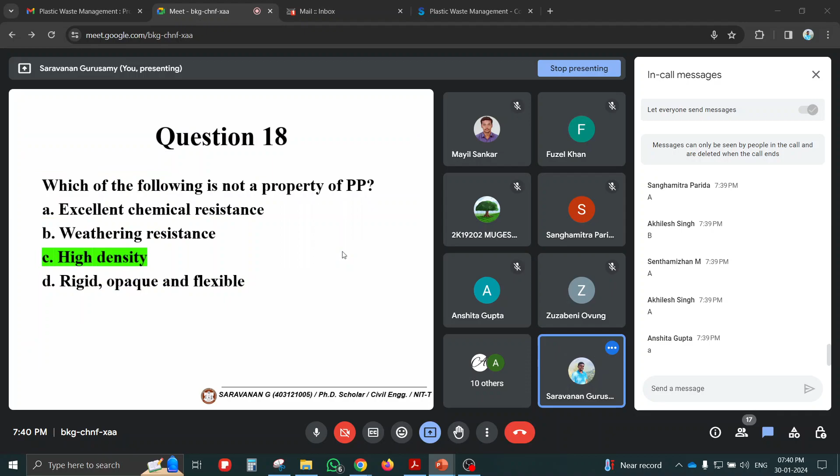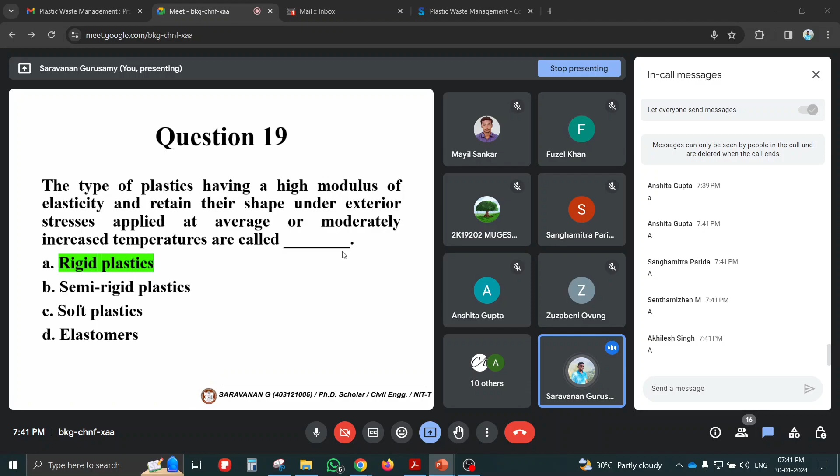Moving to question 19: the type of plastic having a high modulus of elasticity and retaining its shape under exterior stress at average or moderately increasing temperature is called what? Based on elastic, physical and chemical properties, plastics are classified as rigid, semi-rigid, soft, and elastomers. Having high modulus of elasticity refers to rigid plastics, which retain their shape.

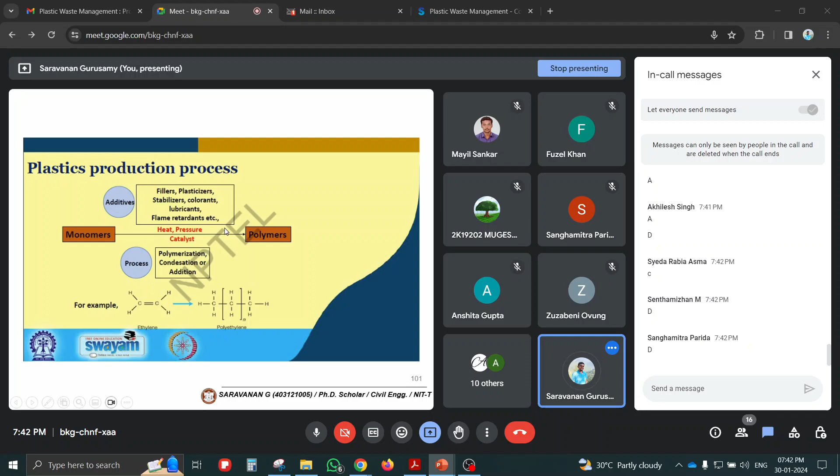Which of the following is an additive used to enhance the properties of plastics? We have seen lots of additives - filler, plasticizers, stabilizers, all the above. Yes, all the above are additives in plastics: fillers, plasticizers, stabilizers, pigments or coloring, solvents, flame retardants. When a monomer is added with additives and undergoes polymerization and condensation, it gives a product called polymer, that is, plastic. Additives such as filler, plasticizers, stabilizers, colorants, lubricants, flame retardants, etc. are added. Catalysts are also added under high temperature and pressure.

Which of the following material is non-biodegradable? This is actually from the zeroth assignment of 2020, so it will be easy. The answer is C.

Why do companies use plastic in their products? They are waterproof, lightweight, and can be made into any shape. Not only B - all the above. The answer is all the above, correct.

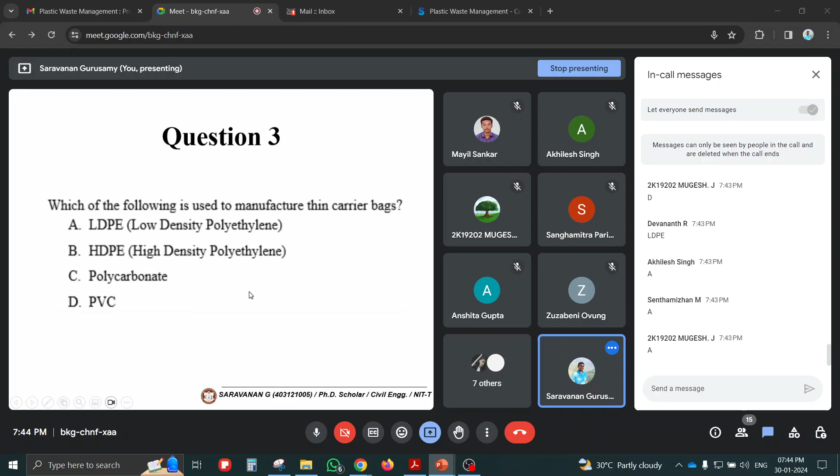Which of the following is used to manufacture thin carrier bags? LDPE, HDPE, polycarbonate, or PVC - it's a repeated question. Yes, LDPE is correct. Which of the following common items do not contain plastic? Toothbrush, chocolate wrapper, mobile phone, none of the above.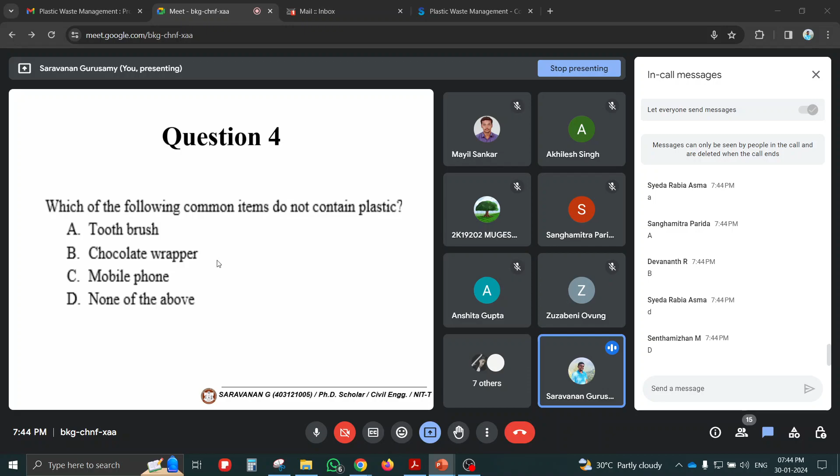All of these items have plastic in it. This is the process of reclaiming raw material and reusing them to create a new product. The process of reclaiming raw material and reusing them in creating new product is called... recycling.

Chocolate wrappers are plastic only. If you see, I have a chocolate in my hand, it's having plastic only, not paper. I don't think paper is used anywhere nowadays. So what is the process of reclaiming raw material and reusing them to create new product? It's the process called recycling. Yes, that's correct.

Moving on to the next question. How does recycling help the earth and the environment? Options: causing less garbage, consume more land space in landfills, makes more garbage, all of the above. So recycling helps in... not all the above, but causing less garbage. If you recycle, the waste is diverted from reaching the landfills, so it will not consume more land space. So option B is wrong. Make more garbage is also wrong. So recycling helps in causing less garbage.

Where does plastic go when we throw it in the bin? Options: land dump, the ocean, recycling factory, all the above. Yeah, anywhere it can go, all the above. So it's also going to recycling plants. Some percent, 9%, is also going to recycling plants if it is collected and segregated properly. So all the above is correct.

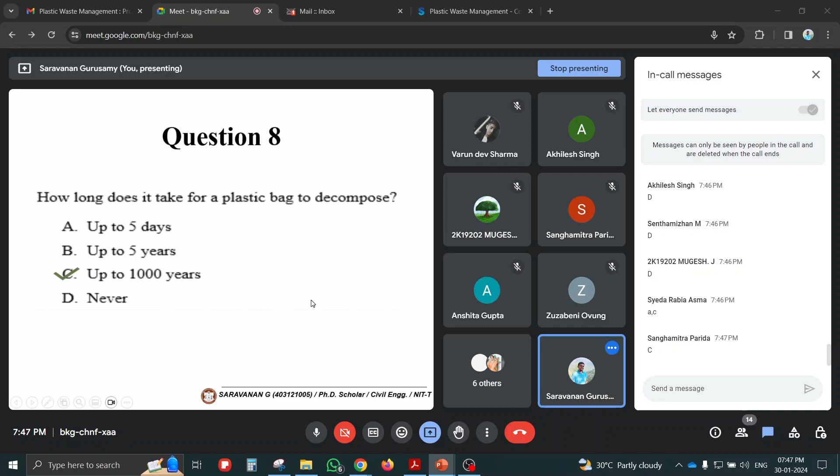Which is not true? So plastic produces toxic fume when burned - that is correct only. Plastic lasts long - that is also correct. Can be used to make compost - that is wrong. Only biodegradable bioplastics are used to make compost. That is also not to make compost - only those that are compostable can.

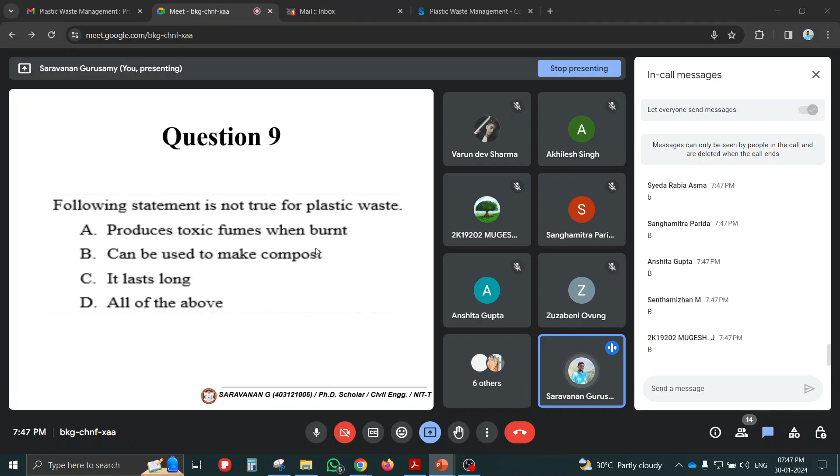The way human use plastic affect the environment. True or false? Yes.

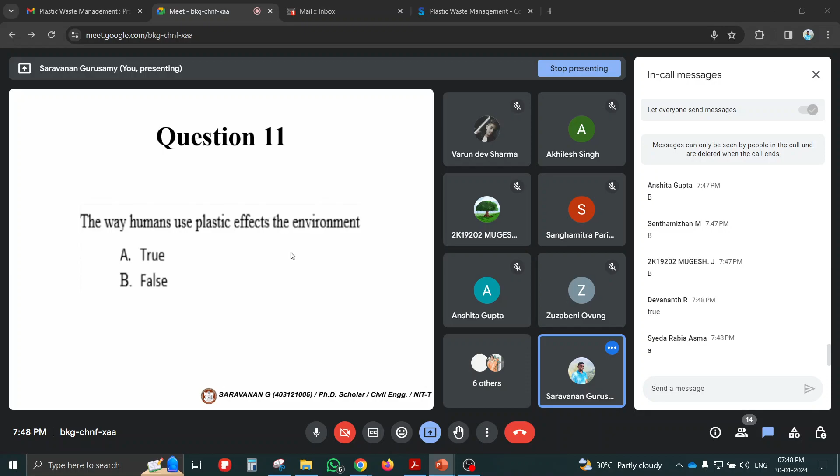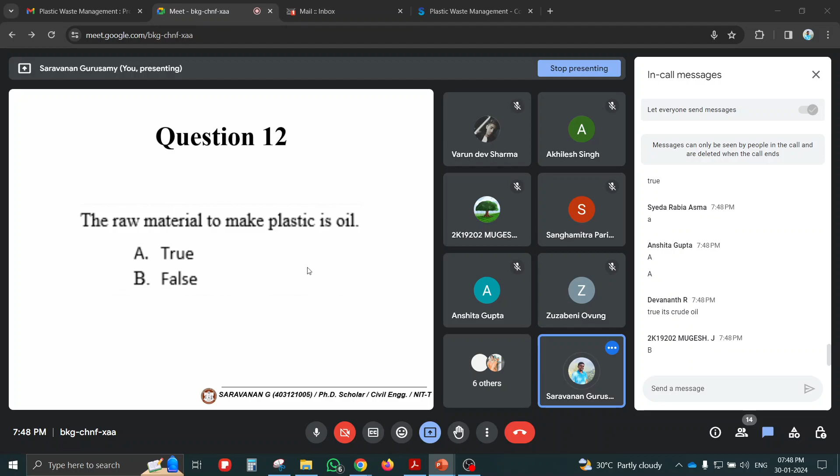It's true. The raw material to make plastic is oil. True or false? Yeah, it's correct. One of the raw materials for making plastic is oil. Yes, it's true.

There are no alternatives to use single-use plastic products. Is it true or false? Not only bioplastics, sir, we have papers. Instead of plastic straw, we have paper straw. Instead of diapers, we use cloths. Instead of plastic carry bags, we can use cloth bags. Instead of plastic cups, now we are using bioplastic cups or reusable cups or stainless steel cups. Instead of plastic plates, paper plates can be used. Like that, we have many options. I have explained here - these are the options we can choose.

Actually, the option is false. One second, I will change this. Yeah, the option is false. Actually, there is no alternative to single-use plastic - is false.

Here are the options, alternatives for single-use plastic. Most of the plastic in the ocean comes from ships at sea. Is it true? Most of the plastic in the ocean comes from ships at sea. Yeah, it's false.

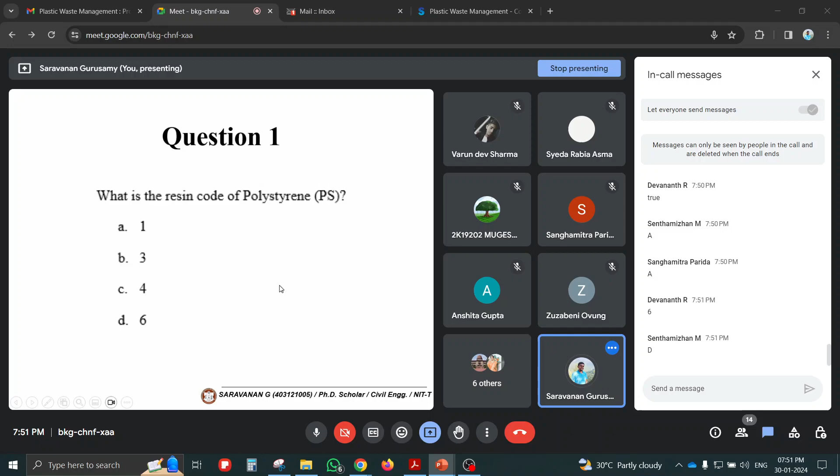So 10 more minutes. What is the resin code for polystyrene? Hope you have remembered the code. The first one is PET, second one is HDPE, third one is PVC, fourth one is LDPE, fifth is PP, sixth is PS, and seventh is others. Yeah, sixth is correct. This is the chart we can go through.

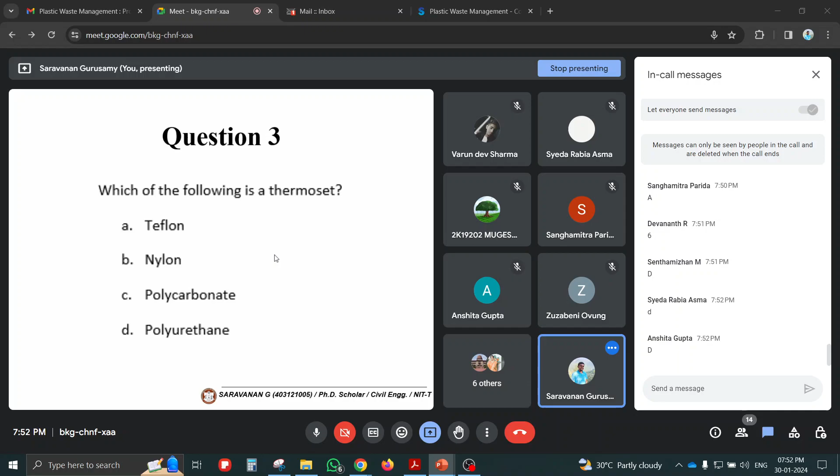Which of the following is a thermoset? They are asking. Polyurethane, is it Teflon, nylon, or polycarbonate? Teflon, nylon, polycarbonate are also thermoplastic. Polyurethane is thermoset. Yes, that's correct.

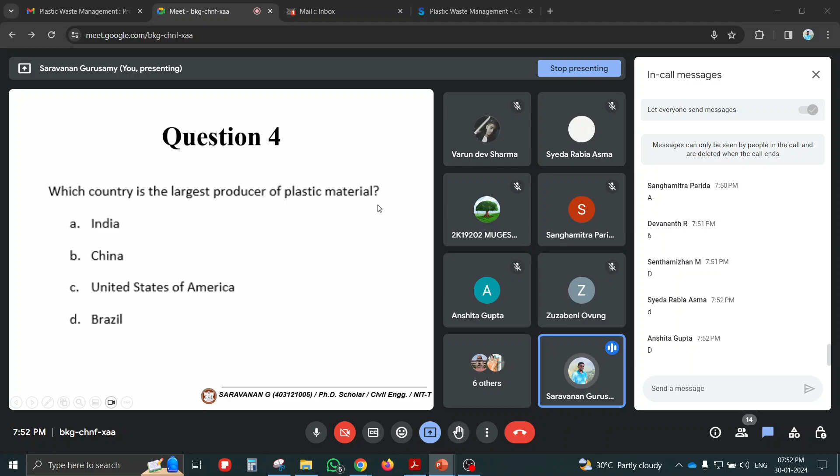Which country is the largest producer of plastic material? This we have already seen, China. Yeah, this is the report.

Many BPA products belong to which of the following category, based on which they are often advised to avoid for food consumption? So you had seen BPA comes under which category? BPA is bisphenol A, that's the plastic. That's categorized under others, that is seventh code. BPA is under seventh code actually. It's toxic, it's not advisable to use in food products or food consumption like packagings and all.

So now you may see some of the water bottles are advised with BPA free, BPA free plastic like that. Some baby products or toys are advised with BPA free products, you can see. So it's coming under others. It's toxic, having health hazards.

Which plastic sector had the highest demand in 2016? That you have already answered. Packaging. Yeah.

Which type of plastic had highest demand in India? That is also already answered. PVC. This is a good question.

Plasticizers are a type of additive added while producing plastic to remove fire propagating radicals, prolong the lifetime of the polymer, improve the plasticity and impart softness to the plastic, impart strength, hardness and other properties to the plastic. Yes, C is correct - improve the plasticity and impart softness to the plastic. That's a property of plasticizer.

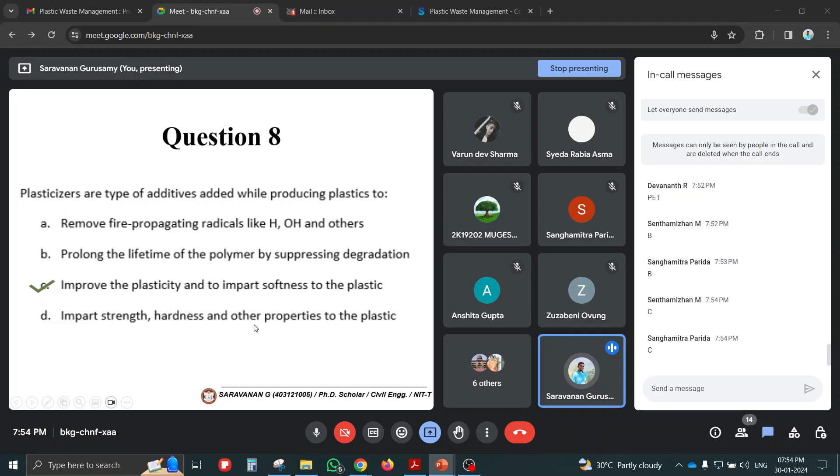Which type of plastic is called a poison plastic? Then you have already answered, PVC. Yes.

Which of the following is not an additive added to enhance the property of plastic? Fillers, plasticizer, lubricant are all additives. But coagulant is not an additive. Yes, correct.

Plastic generally includes a main chain organic link, side linked molecular group, and some organic and inorganic additives. True or false? Yeah, it's true.

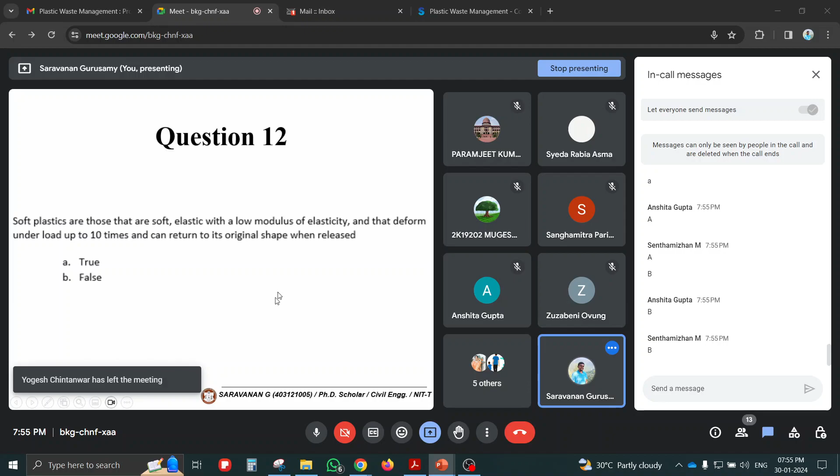Soft plastics are those that are soft, elastic, with low modulus of elasticity and that deform under load up to 10 times and can return to their original shape when released. Is it true or false? Yeah, it's wrong, because soft plastic has low modulus of elasticity, but elastomers are the ones which extend 10 times their original dimension. So the answer is false.

Commonly used flame retardants in plastic are organohalogen compounds. Is it true or false? False question - yeah, it's true. So the commonly used flame retardants are brominated flame retardants or organohalogen compounds.

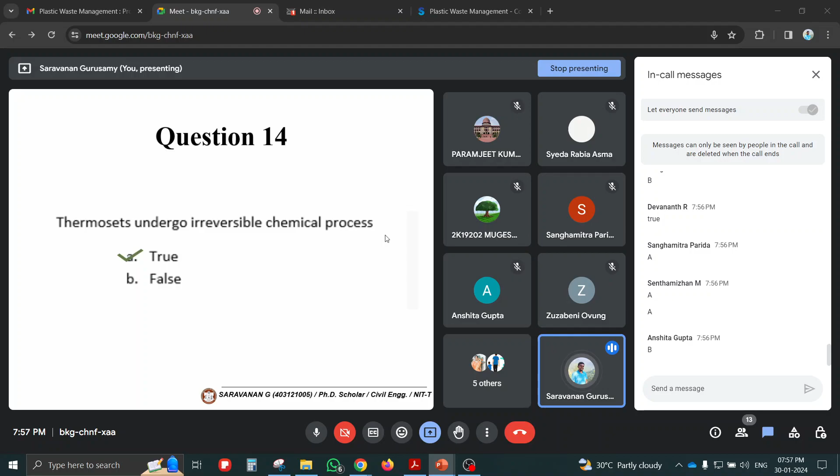Thermosets undergo irreversible chemical process. True or false? I'm sorry, it's actually true, it will undergo irreversible chemical process. It's correct - thermoplastics are reversible, but thermosets undergo irreversible chemical process, we can't recycle. That's the property of thermosets, they undergo irreversible chemical process.

The last question: Plastics are limited to a set of characteristics and colors and are hard to manufacture. True or false? Yeah, it's false.